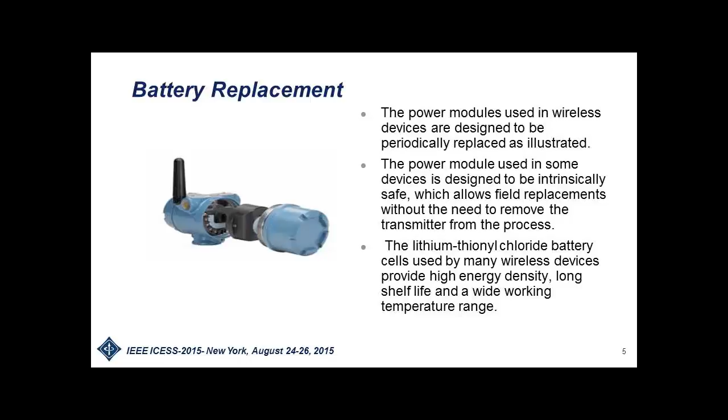This introduces some technical challenges, since most control systems today are based upon the control measurement being periodically updated. Also, tools used in analyzing control are also based upon periodic measurement update. In most cases, the devices today are battery powered. To achieve a 5 to 7 year battery life, the fastest update rate can be 8 seconds or slower. Using the slow update rate and aperiodic communication can be a challenge.

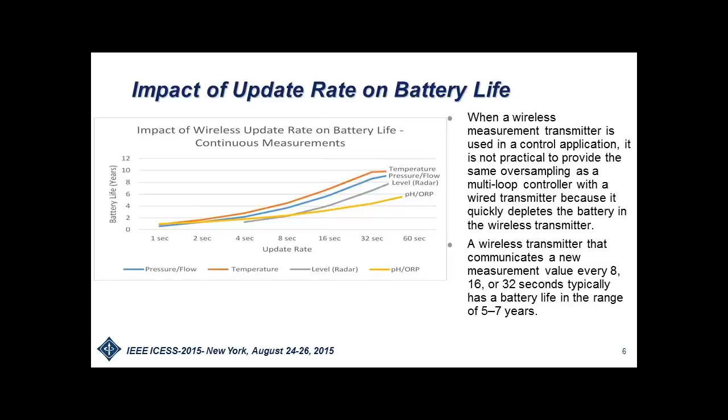But by using the PIDPlus algorithm, it's possible to use this slow update rate and non-periodic communication quite effectively in terms of control. The PID plus is a PID in which the integral component is calculated using a positive feedback network, and the contribution due to derivative and integral are only updated when you get a new communication.

The proportional action continues to operate all the time, and the actual algorithm is executed much faster than the actual communication update rate. As a result, any change in set point is immediately acted upon. The change in output introduced by the proportional action is reflected accurately then in terms of the integral calculation done with the positive feedback network.

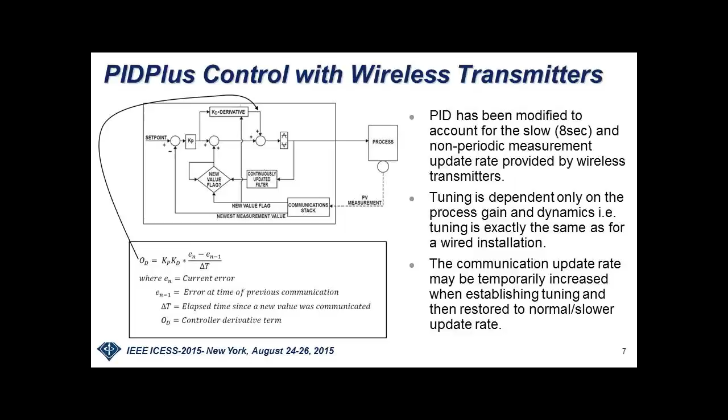Many installations have been done in which the PID plus has been used on a variety of process applications. So this technique has been very successfully used in terms of wireless control. To give you an example of the response seen with PID plus, we have two identical processes, one controlled with PID and a wired measurement, the other with PID plus and a wireless measurement. The tuning of the PID plus and PID are identical.

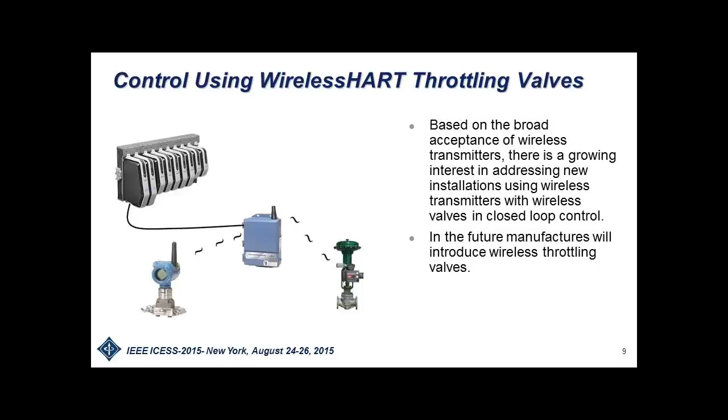In some new applications such as upstream oil and gas, there's a real economic incentive to have a total wireless control loop. That is not only the wireless measurement, but also have a wireless throttling control valve. So this economic incentive is driving manufacturers then to develop wireless throttling valves.

In actual life, though, the problem becomes much more complicated. Most of the power associated with the actuator is used in actually moving the valve.

So with a wireless actuator, there's a reason then to try to minimize the frequency with which the actuator is changed. Also, the communication from the gateway down to the valve can take some time, and also the response is not instantaneous. It can also take some time in getting back to the gateway. So we need to somehow deal with these delays due to communication.

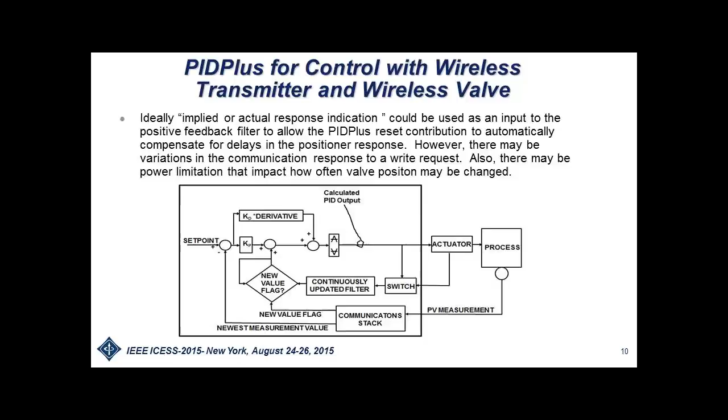To minimize the change of movement on the valve, we can implement something called minimization of valve movement. This is pretty much like our window communication, where changes in PID output are not acted upon unless the change in valve position from its last communicated value exceeds some deadband, or if the time since the last valve change has exceeded some default.

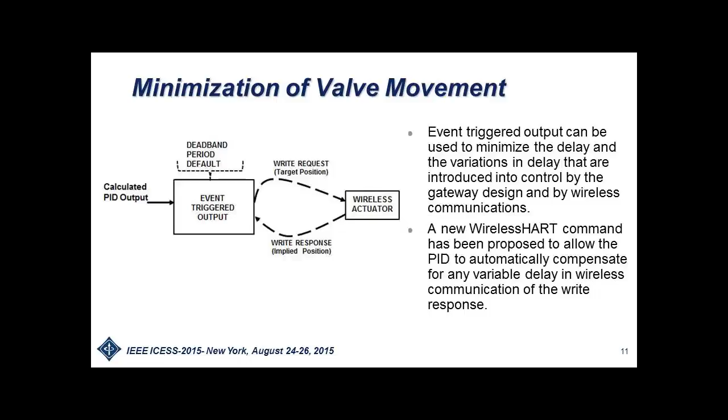By implementing this minimization of movement technique, then we can reduce the number of changes in valves by a significant amount. However, this doesn't help us in terms of compensating for the delay of the communication to the valve and the communication delay of the response back up to the gateway. To address that, it's been proposed that a new HART command be introduced. This command is called time to apply target output.

With this new command, when a request is made to change the valve, not only the valve position is communicated, but also time to apply. So when the command is actually received by the valve, it will hold the change in position until the time to apply has been reached, and then at that time it can apply the change. So for example, it might take 3 seconds to get from the gateway down to the valve, but if the time to apply was 5 seconds, it would hold the requested valve change for 2 additional seconds so that the valve changes exactly 5 seconds after the command was issued from the gateway.

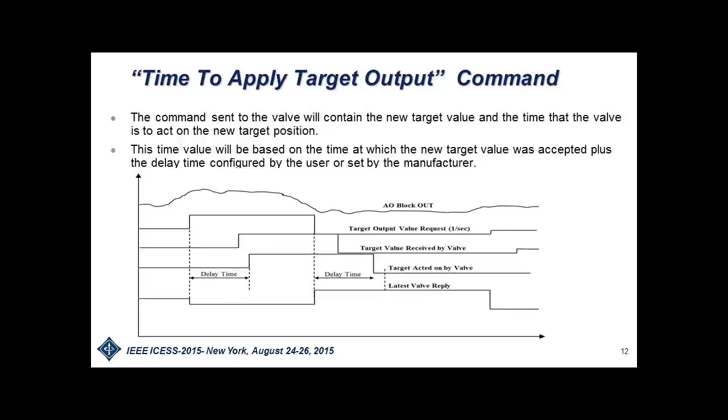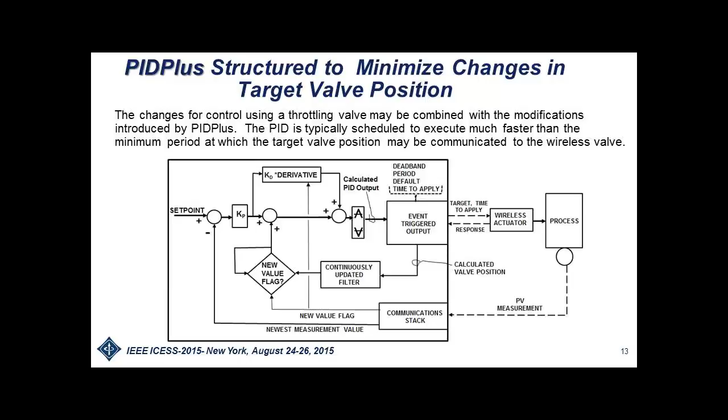By implementing this time to apply, then, it's possible to calculate the valve position quite accurately, even though we can't measure it due to the delay going down to the valve and the response coming back. So if that calculated valve position then is used in the positive feedback network, we can compensate exactly for the delay introduced into the movement of the valve by communication.

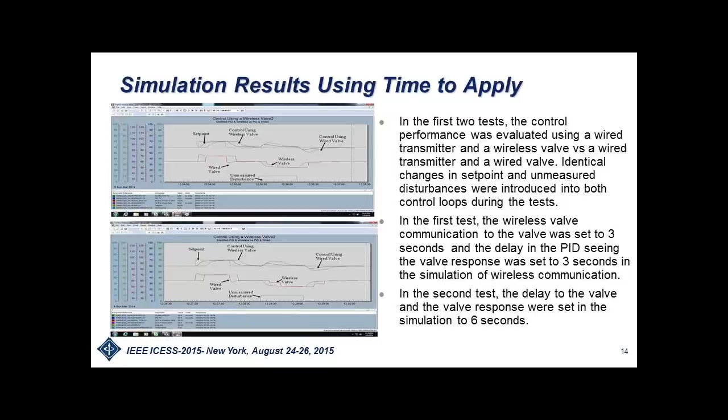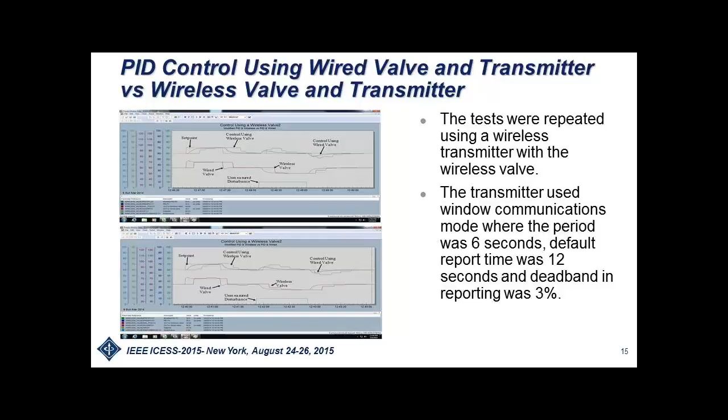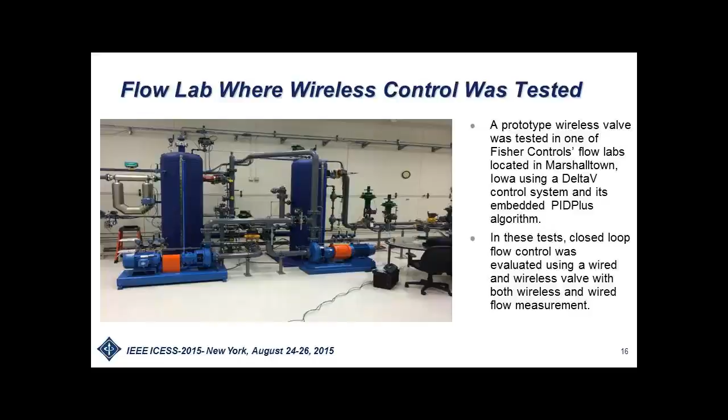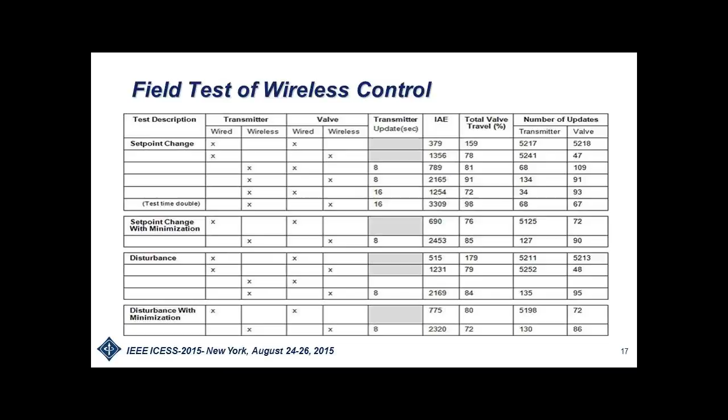So using this setup, we did a battery of tests of wireless control. In this test, we were looking at both the set point change and the response to unmeasured disturbances. We're looking at minimization of output change and its impact on control as well.

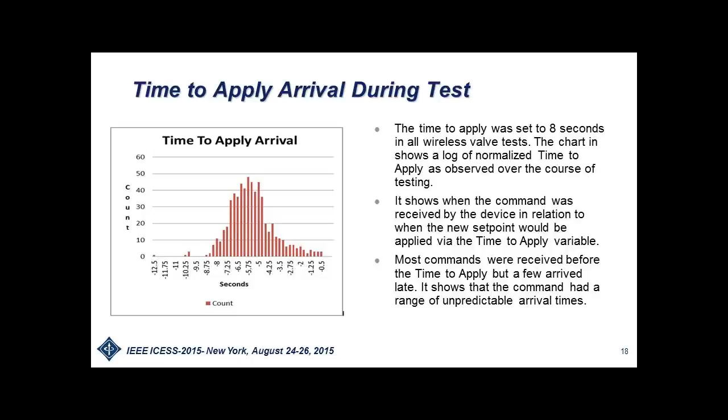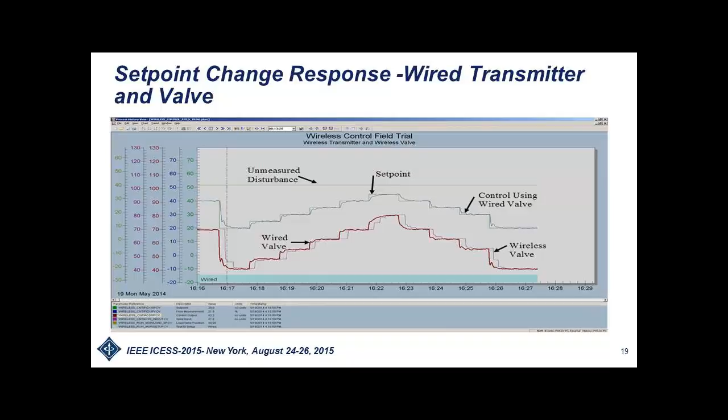In this test, we were using a wired transmitter and wired valve. And you notice the process is quite responsive, about a 3-second process response time. There are some secondary dynamics going on due to those tanks that you noticed in the process setup. And so it's very realistic in terms of the type of noise and response that you might find in a process within a plant environment.

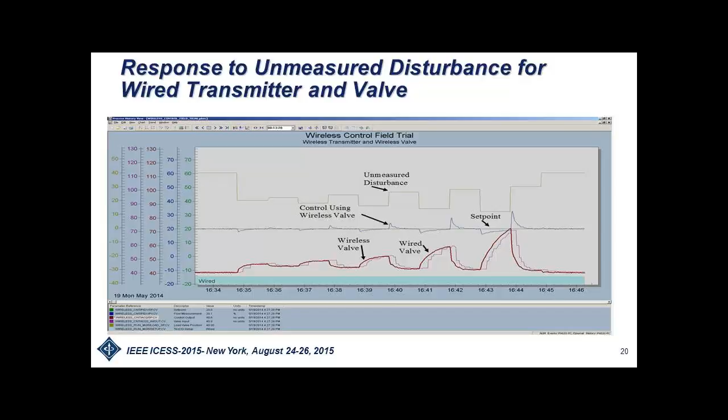This shows the response for unmeasured disturbance. As you'll notice, as the disturbance is introduced, the controller has to do work to bring the control parameter back to set point, and as the disturbances get bigger, bigger valve changes are required to correct for the disturbance.

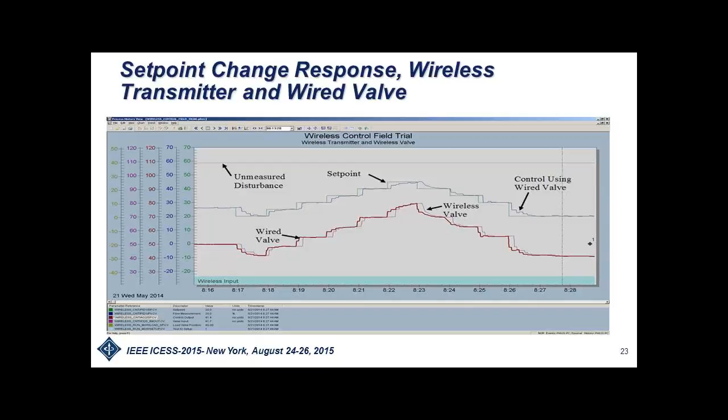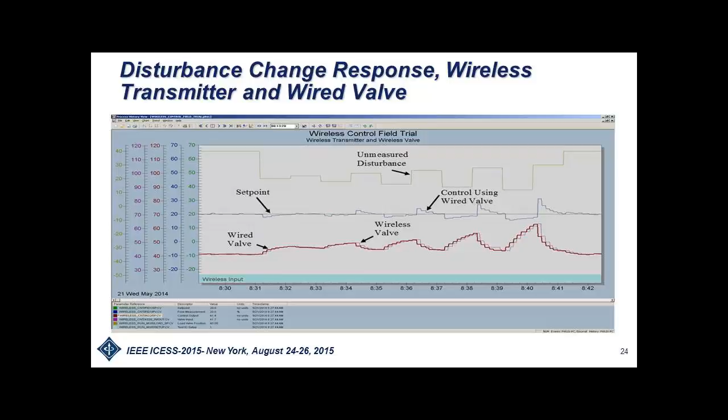Here we're showing the flow lab where we're using the wireless transmitter and a wired valve. Here you notice that the response is really quite good. You do see some difference between that and what we saw with a wired installation just due to the fact that the measurement is only being updated every 8 seconds. This shows the response using the wireless transmitter to unmeasured disturbances, and again the response is very close to what you would see with a wired installation.

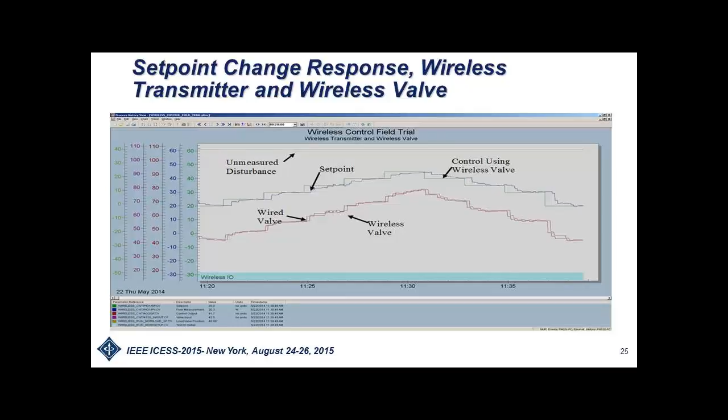In this chart we're showing the response to set point using a wireless transmitter updating at 8 seconds and a wireless valve with a time to apply of 8 seconds. As you can see on a set point change, the control parameter comes to set point without any hunting or oscillation. So the response is very close to what you would see with a wired installation other than the time to apply. This shows the response to unmeasured disturbances using our wireless transmitter and the wireless valve. And again, response is very good, pretty much what we saw with the wired transmitter and wired valve.

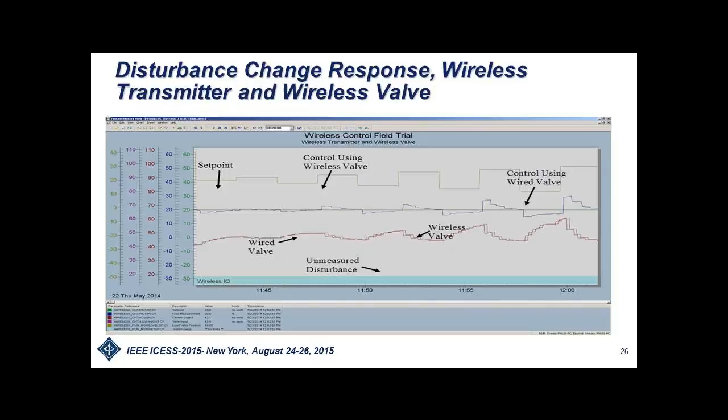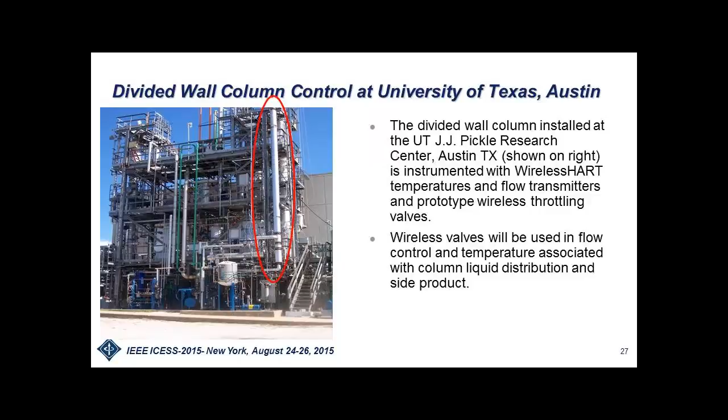As soon as we get beta adapters, we'll be testing those at the J.J. Pickle Research Center at UT. The process that we'll be instrumenting there with these wireless adapters is the divided wall column that's shown in red here. On the column, on the liquid distribution, there are 3 valves that the wireless adapter will be applied to. 2 of those will be controlling liquid flow. They're secondaries of a cascade, so their set point will be constantly changing to maintain level and flow ratio. The third valve will be adjusting steam to a steam heater, single loop type control where we have a constant set point in that case.

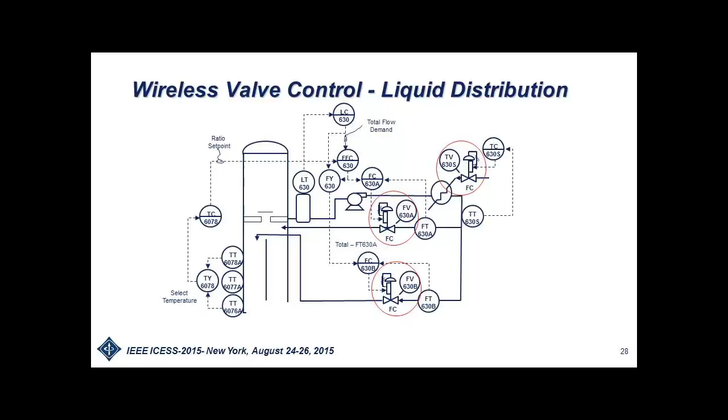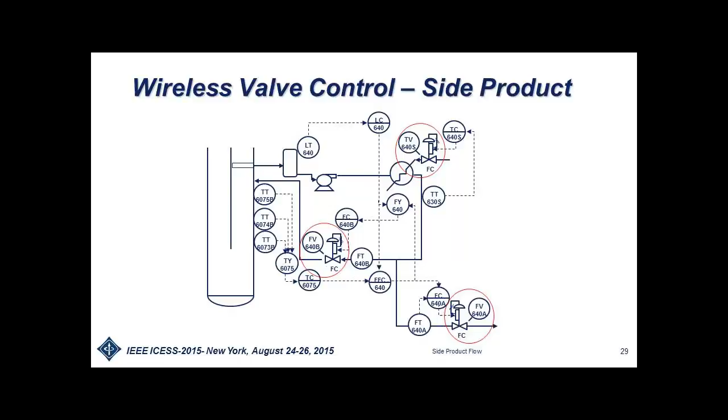Also we'll be instrumenting the side product takeoff, where we'll be doing flow control in 2 cases where the flow controller is a secondary of a cascade, and also doing our temperature control using a wireless temperature measurement as well as a wireless valve. So in the future you can look for us to be writing a paper on the test results using the beta adapter on the valves at this particular site.

In summary, it's very possible today to use wireless measurements in closed loop control. The performance is very much comparable to what you would achieve with a wired transmitter. Wireless valves are in the development stage and will be released here soon. As soon as those become available on the market, then total wireless control loop becomes possible. To implement that and provide good quality of control, the key is to use this time to apply command, and also design in the modifications that we went through on the PID Plus that are required when you're dealing with a wireless valve.